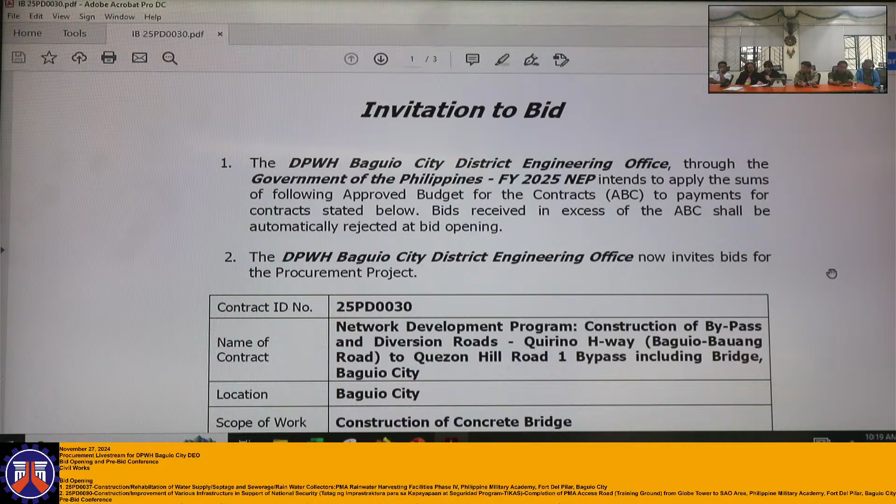Let me state it again. Contract ID number 25PD0030. Name of contract: Network Development Program, Construction of Bypass and Diversion Roads, Quirino Highway, Baguio-Bauang Road to Quezon Hill, Road 1, Bypass including Bridge, Baguio City.

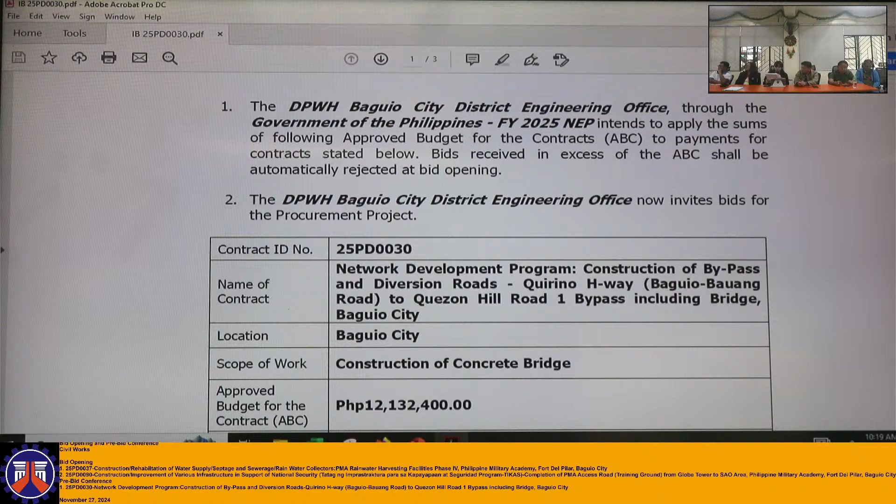Scope of work, location: Baguio City, of course. Scope of work: construction of concrete bridge.

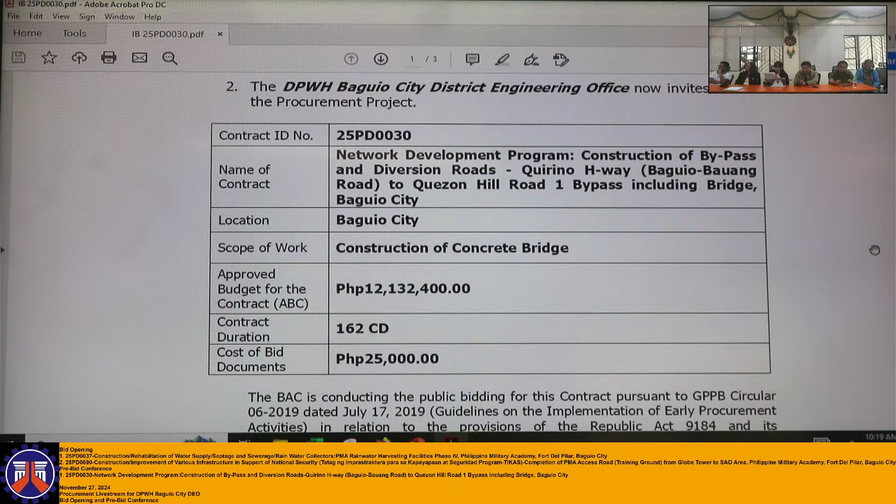The approved budget for the contract is 12,132,400 pesos. Contract duration is 162 calendar days. Cost of bid documents is 25,000.

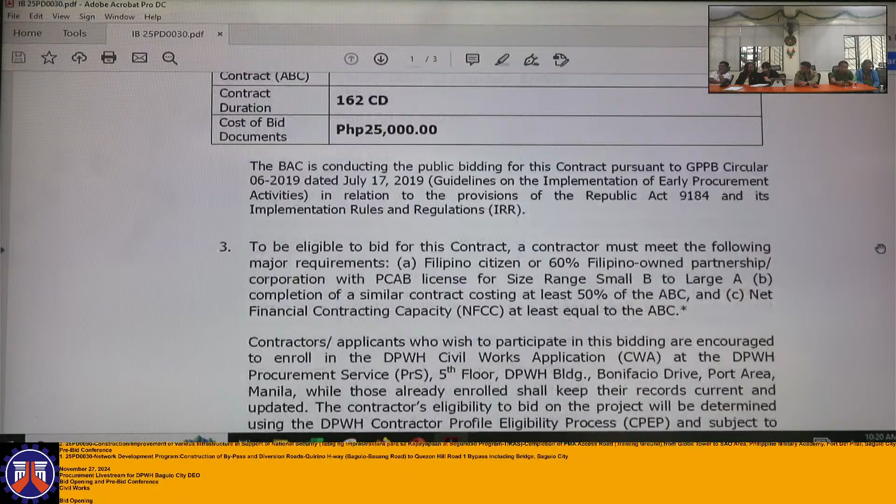The BAC is conducting the public bidding for this contract pursuant to GPPB Circular 06-2019 dated July 17, 2019, Guidelines on the Implementation of Early Procurement Activities in relation to the provisions of Republic Act 9184 and its Implementing Rules and Regulations, IRR.

To be eligible to bid for this contract, a contractor must meet the following major requirements: First, Filipino citizen or 60% Filipino-owned partnership or corporation with PCAB license for size range Small B to Large A; second, completion of a similar contract costing at least 50% of the ABC; and lastly, Net Financial Contracting Capacity, NFCC, at least equal to the ABC.

Contractors and applicants who wish to participate in this bidding are encouraged to enroll in the DPWH Civil Works Application at the DPWH Procurement Service, 5th Floor, DPWH Building, Bonifacio Drive, Port Area, Manila, while those already enrolled shall keep their records current and updated.

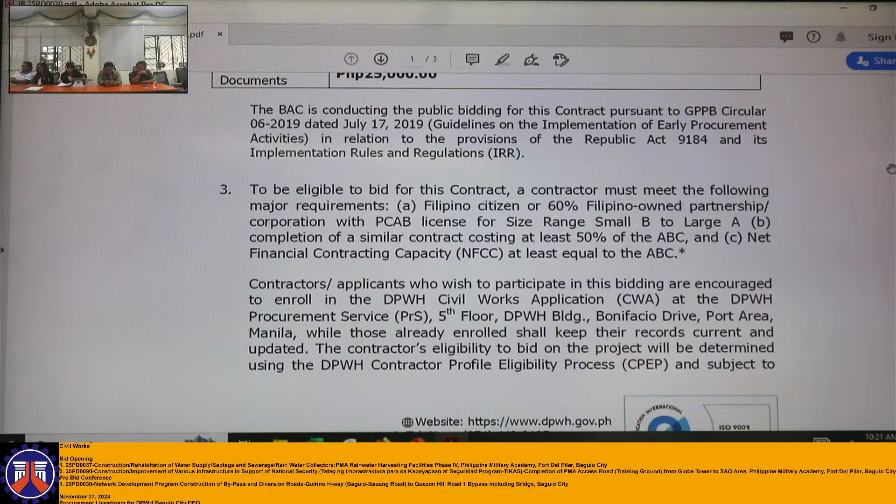The contractor's eligibility to bid on the project will be determined using the DPWH Contractor Profile Eligibility process, subject to further post-qualification. Information on registration can be obtained from the PRS during working weekdays from 7 a.m. to 4 p.m., or at the DPWH website, www.dpwh.gov.ph.

Bidding will be conducted through open competitive bidding procedures using non-discretionary pass-fail criterion as specified in the 2016 Revised Implementing Rules and Regulations of Republic Act Number 9184.

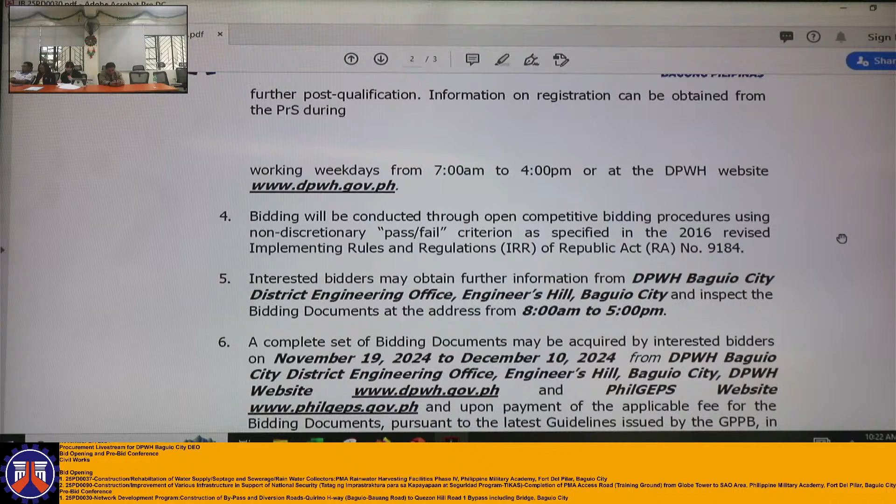Interested bidders may obtain further information from DPWH Baguio City District Engineering Office, Engineer's Hill, Baguio City, and inspect the bidding documents at the address from 8 a.m. to 5 p.m.

A complete set of bidding documents may be acquired by interested bidders from November 19, 2024 to December 10, 2024 from DPWH Baguio City District Engineering Office, Engineer's Hill, Baguio City, the DPWH website www.dpwh.gov.ph, and PhilGEPS website www.philgeps.gov.ph, upon payment of the applicable fee for the bidding documents pursuant to the latest guidelines issued by the GPPB.

In the amount stated, the procuring entity shall allow the bidder to present its proof of payment for the fees if it will be presented in person, by facsimile, or through electronic means.

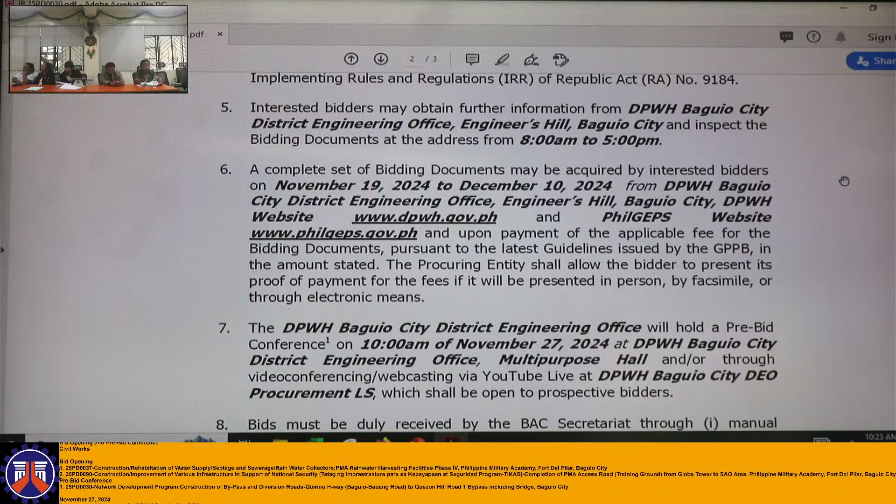The DPWH Baguio City District Engineering Office will hold a pre-bid conference at 10 a.m. on November 27, 2024 at DPWH Baguio City District Engineering Office Multipurpose Hall, and/or through video conferencing and webcasting via YouTube Live at DPWH Baguio City DEO Procurement LS, which shall be open to prospective bidders.

Bids must be duly received by the BAC Secretariat through manual submission at the office address as indicated, or online/electronic submission at electronicbids_baguiocity@dpwh.gov.ph, or both, on or before 10 a.m. of December 10, 2024. Late bids shall not be accepted.

All bids must be accompanied by a bid security in any of the acceptable forms and in the amount stated in ITB Clause 16. Bid opening shall be at 10 a.m. of December 10, 2024 at the given address and/or through electronicbids_baguiocity@dpwh.gov.ph. Bids will be opened in the presence of the bidders' representatives who choose to attend the activity.

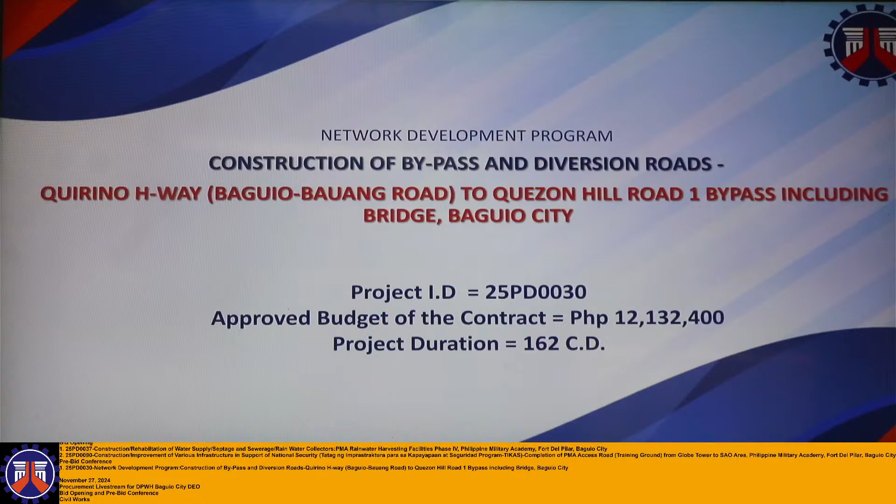The project is at Quirino Highway, Baguio-Bauang Road to Quezon Hill Road 1 bypass, including bridge, Baguio City. The project has a project ID of 25PD0030 and an approved budget of the contract of 12,132,400 pesos, with a project duration of 162 calendar days. This project was coordinated with Barangay Irisan last October 29, 2024.

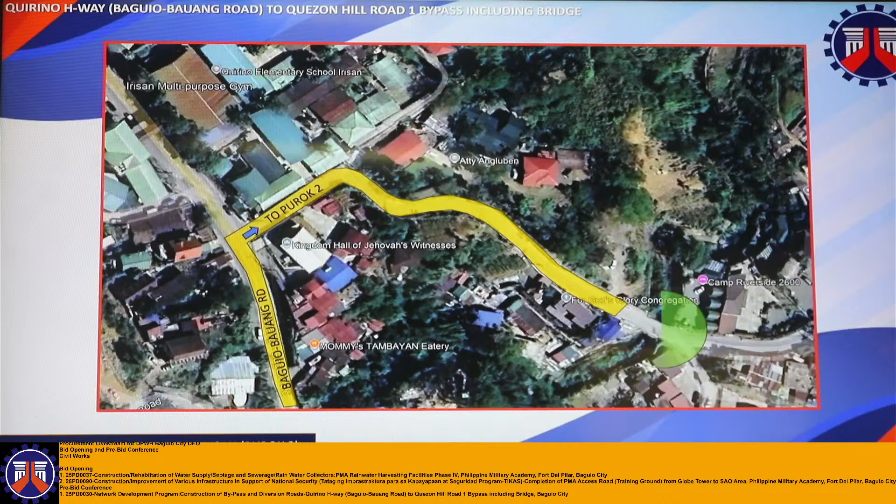For the project location: if this is the Baguio-Bauang Road, it enters Purok 2 near Quirino Elementary School, Irisan. In front of Quirino Elementary School, Irisan, there is a road going down. From that location, we go down 150 meters and this will be our project site.

This part is the bridge, including the road, with scouring protection upstream and downstream of the river. This is the downstream.

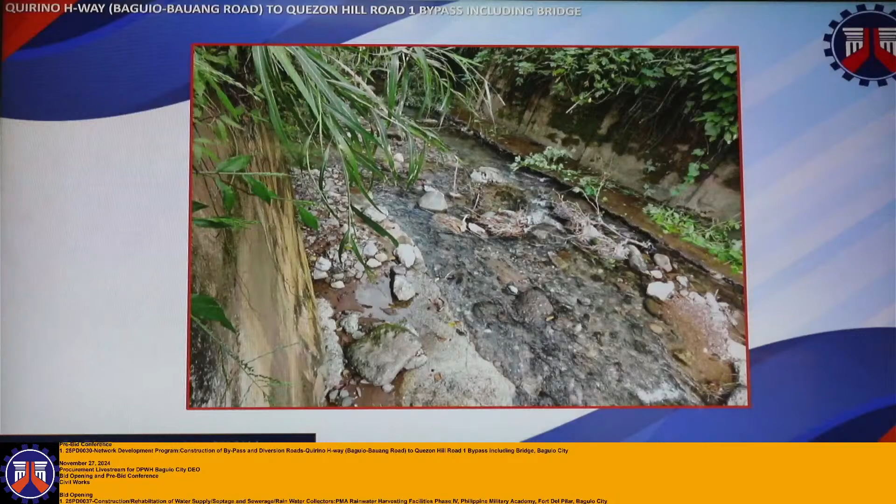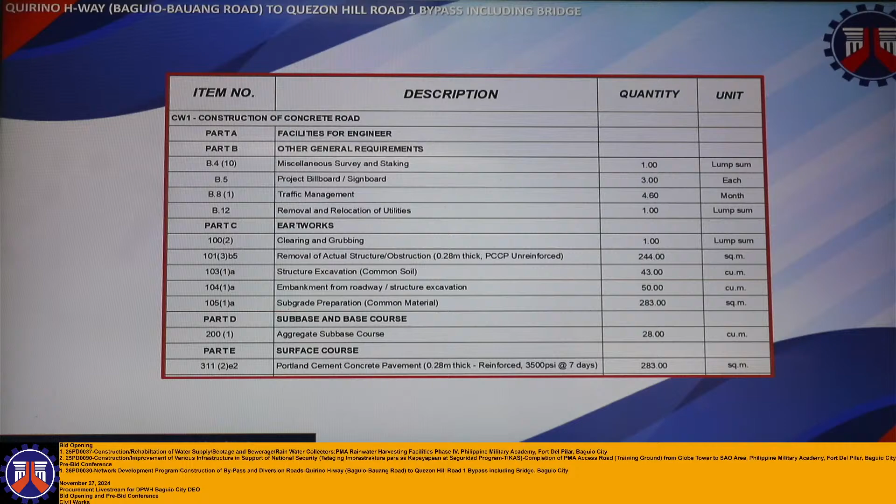For the summary of quantities, for CW1, construction of concrete road: other general requirements, miscellaneous survey and staking, project billboard, traffic management, removal and relocation of utilities. Under earthworks: clearing and grubbing, removal of actual structures, structure excavation, embankment from roadways, structure excavation, subgrade preparation. Under sub-base and base course: aggregate sub-base course, and for surface course, Portland cement concrete pavement 0.28 meter thick, reinforced, 3,500 PSI at 7 days.

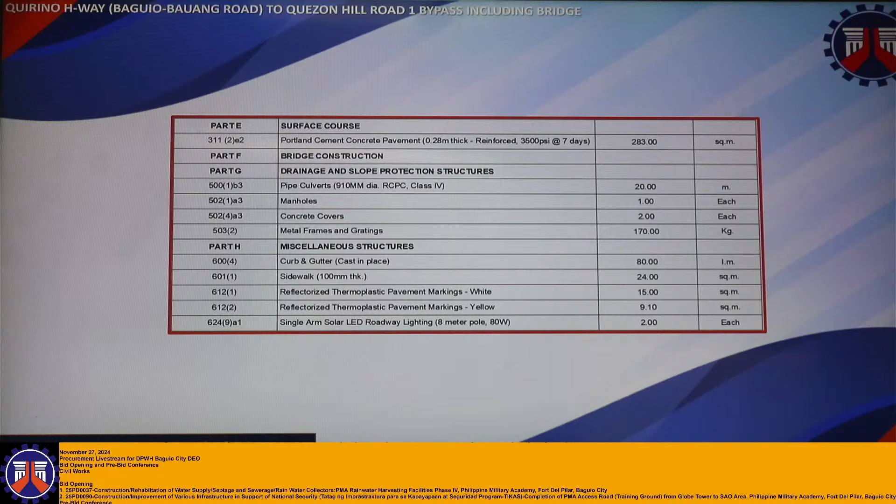For surface course, we have Portland cement concrete pavement. For drainage and slope protection structure, we have pipe culverts, manholes, concrete covers, metal frames, and gratings. For miscellaneous structures: curb and gutters, sidewalk, thermoplastic pavement markings, and single-arm solar LED roadway lighting.

For CW2, under other general requirements: occupational safety and health program, mobilization, demobilization, detour or access road. Under earthworks: shoring, cribbing, and related works, removal of structures and obstructions, structure excavation, bridge structure excavation, hard rock and common soil, foundation fill, selected borrows.

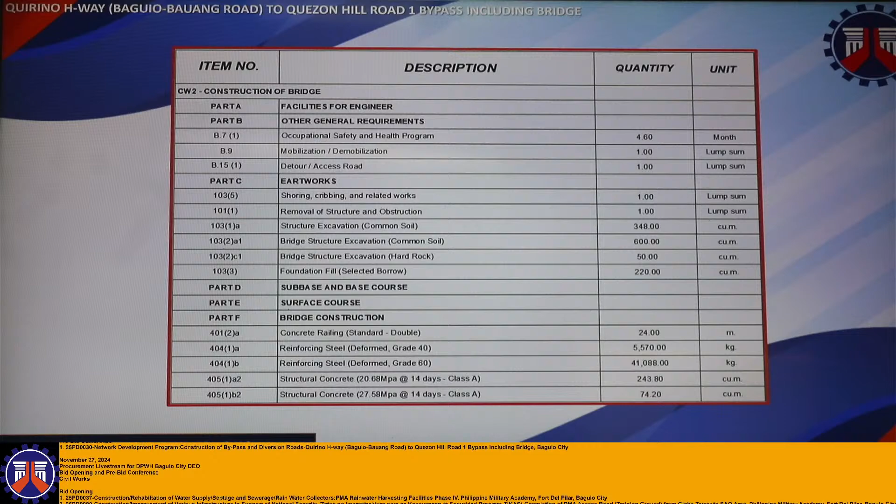Under bridge construction: concrete railing, reinforcing steel deformed grade 40 and grade 60, structural concrete 20.68 MPa at 14 days Class A and 27.58 MPa at 14 days Class A. We also have lean concrete, structural concrete painting works, and pre-molded expansion joint fillers with sealant.

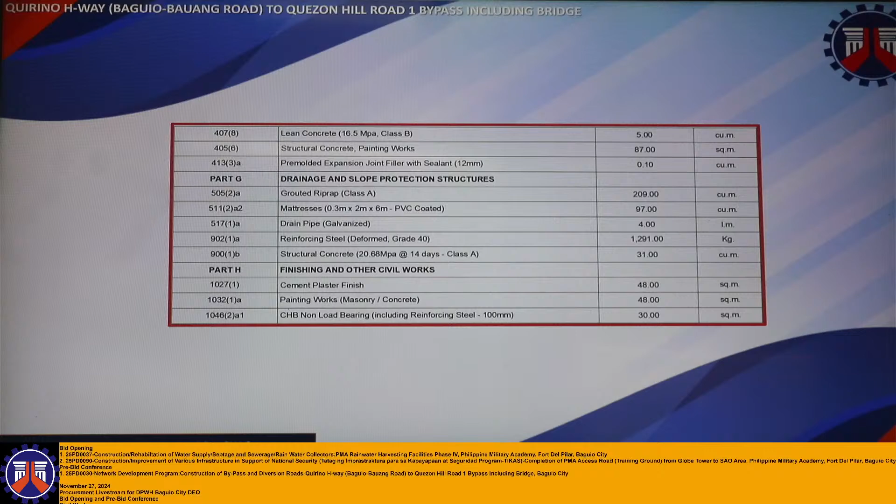Under drainage and slope protection structures: grouted riprap, mattresses, drain pipe, reinforcing steel grade 40, structural concrete 20.68 MPa at 14 days Class A. Under finishing and other civil works: cement plaster finish, painting works, and CHB non-load bearing, including reinforcing steel.

This is the parcellary plan of the project. We have the proposed bridge having a length of 12 meters, with an approach slab of 4.5 meters at both ends of the bridge.

The constructed reinforced concrete PCCP with curb and gutter both sides, having a total length of 10 meters both sides. We will also be constructing a sidewalk at the left side from the start of the project, 10 meters in length as well.

And the proposed pipe culvert with a length of 20 meters, and the proposed manhole with cover. We also have a proposed 2 LED solar roadway lighting at both ends of the bridge, left and right.

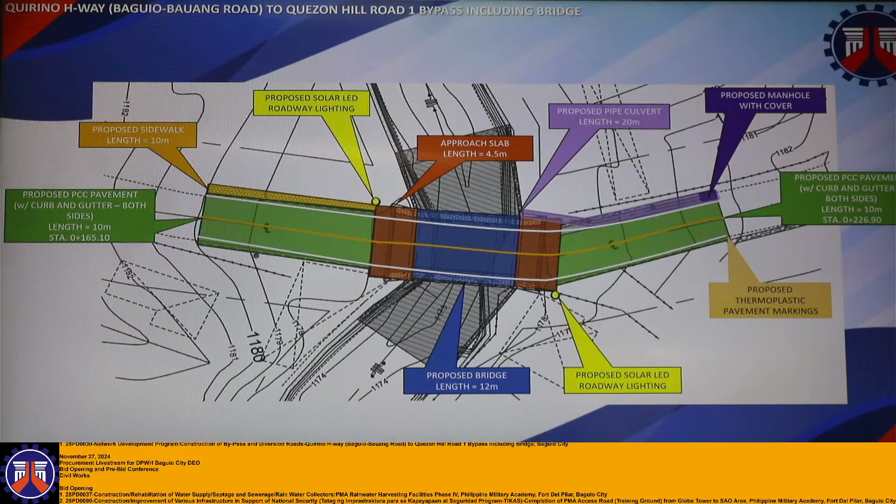And the proposed thermoplastic pavement markings, white at both edges of the road, and for the center line, yellow.

We will build a 3-meter high riprap behind the abutment, both sides, 10 meters in length both sides. And for the protection of the embankment of the river, we will build an approximately average height of 5 meters of riprap, 10 meters in length both sides upstream and 10 meters in length both sides downstream.

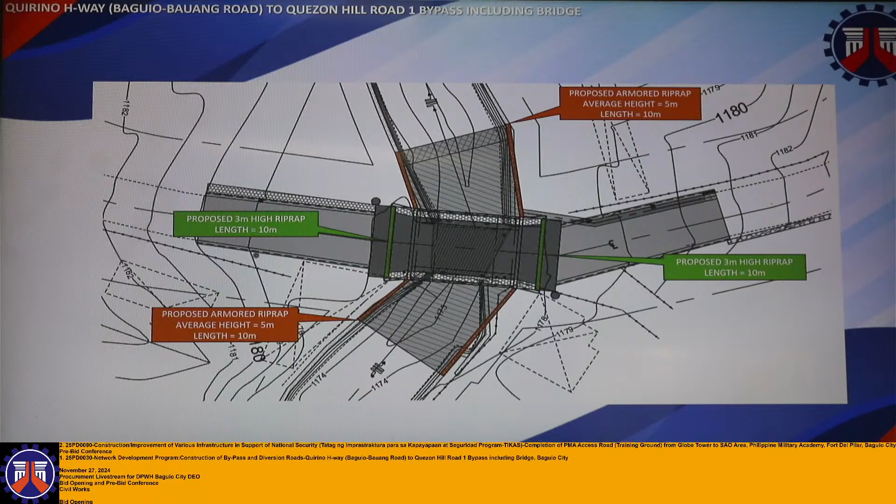For the scouring protection, we will build a mattress 30 meters in length from upstream to downstream, plus an additional mattress downstream of 2 meters in length, and 0.30 meter thickness.

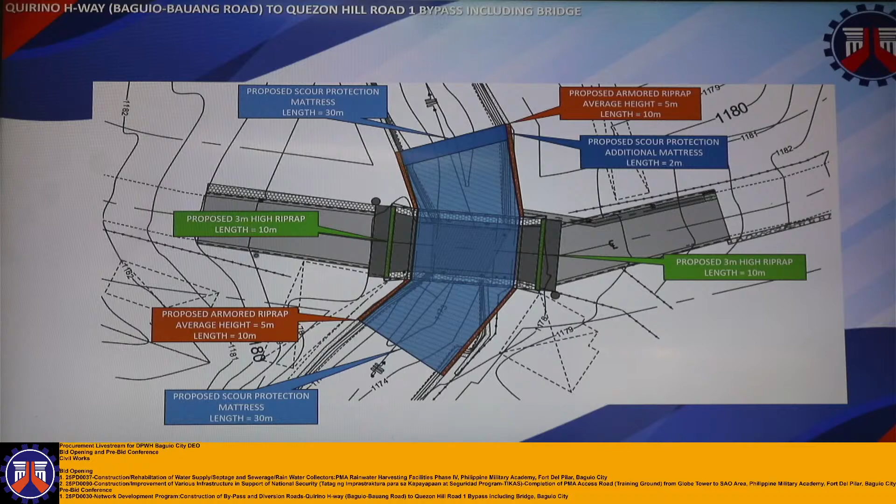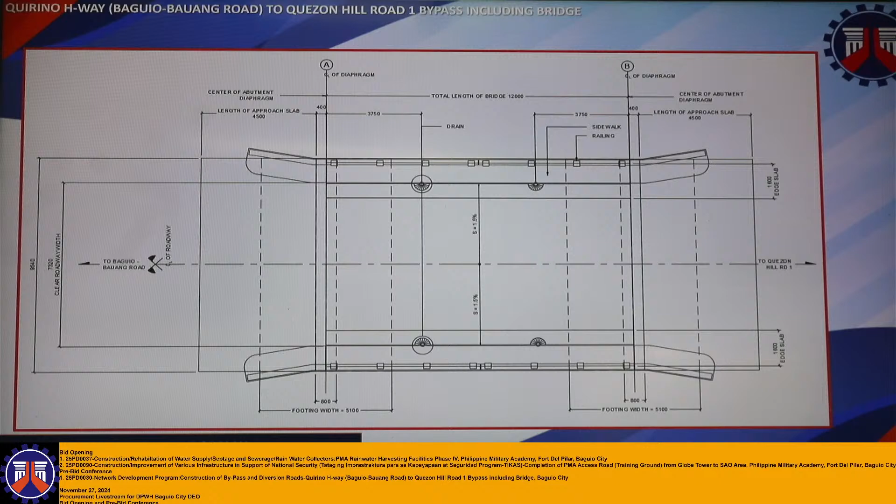This is the bridge plan. The bridge has a total length of 12 meters. The length of the approach slab is 4.5 meters. The total width of the bridge is 9.54 meters. The footing of the abutment will have a width of 5.1 meters. Thickness of the abutment stem would be 800 millimeters.

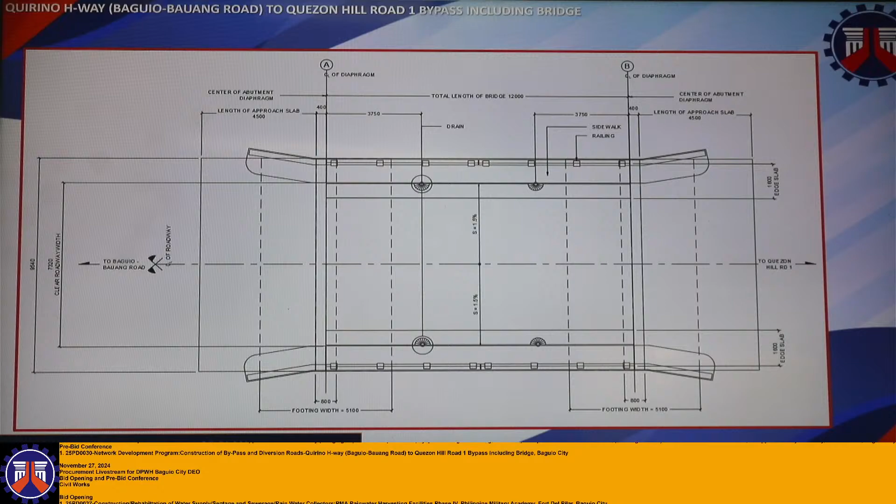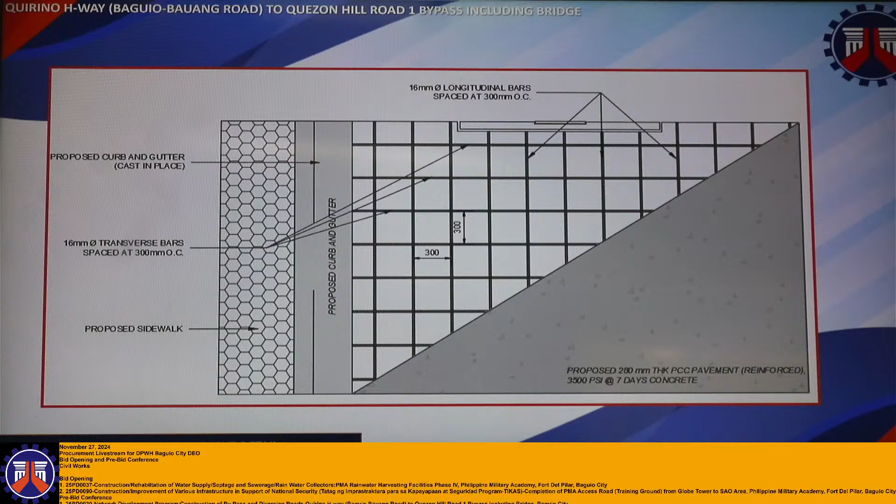So for the 280-millimeter thick PCCP pavement, it is reinforced with 16 millimeter diameter transverse and longitudinal bars spaced at 300 millimeter on center.

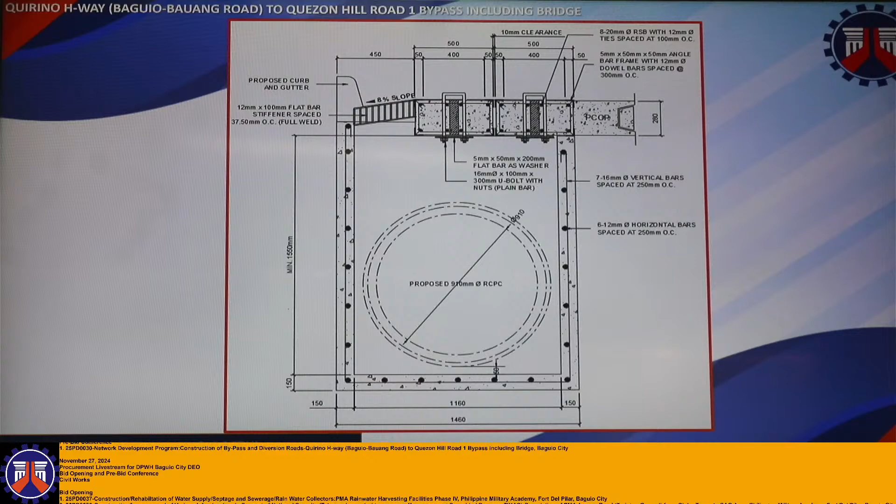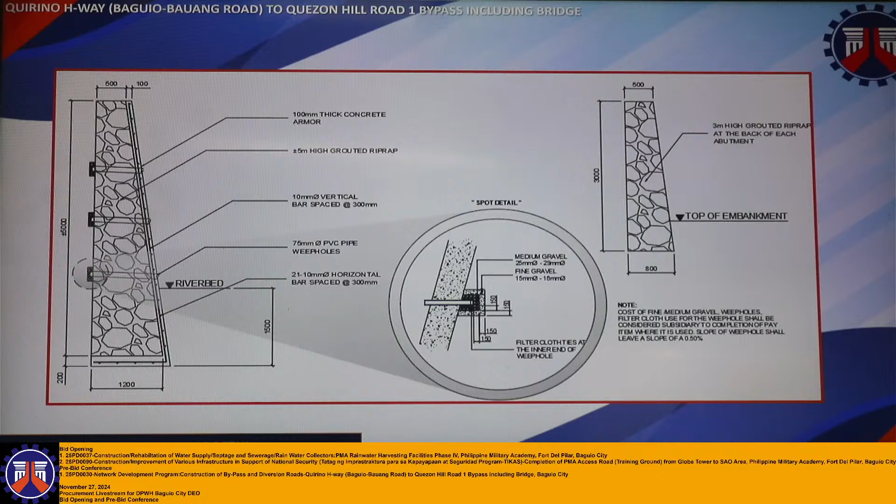And we will be using a 910 millimeter diameter RCPC pipe for the drainage system. This is the proposed riprap detail. For the 3-meter riprap at the back of the abutment, the top width will be 500 millimeter and the bottom width 800 millimeter. For the 7-meter slope protection riprap at the side of the river, armored riprap will be used. Average height of the riprap is 5 meters.

And the width thickness is 500 millimeter and the bottom thickness will be 1200 millimeter. And this is the detail for the roadway lighting. So 8 meters is the height of the single arm lamppost. Bottom diameter will be 8 inches and the top diameter will be 4 inches with a thickness of 3.50 millimeter. For the base, we will be using a 500 millimeter by 500 millimeter reinforced concrete pedestal.

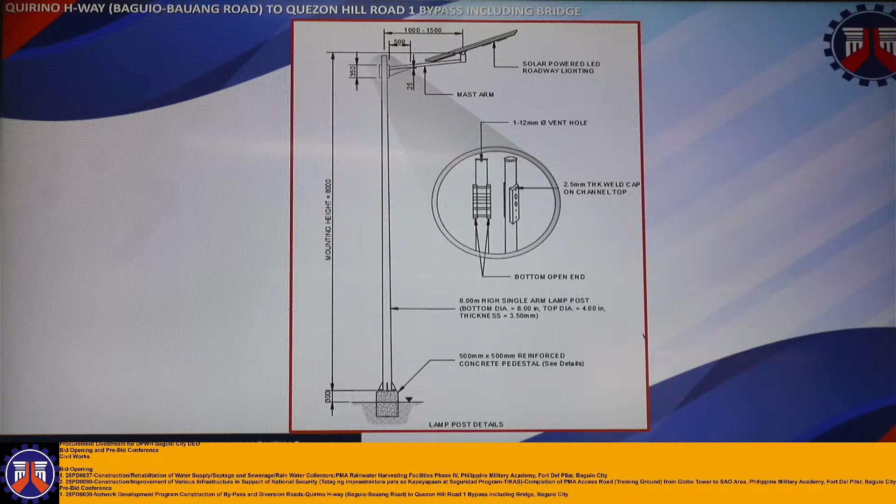And we will use solar LED roadway lighting. And that is the end of the presentation. Thank you.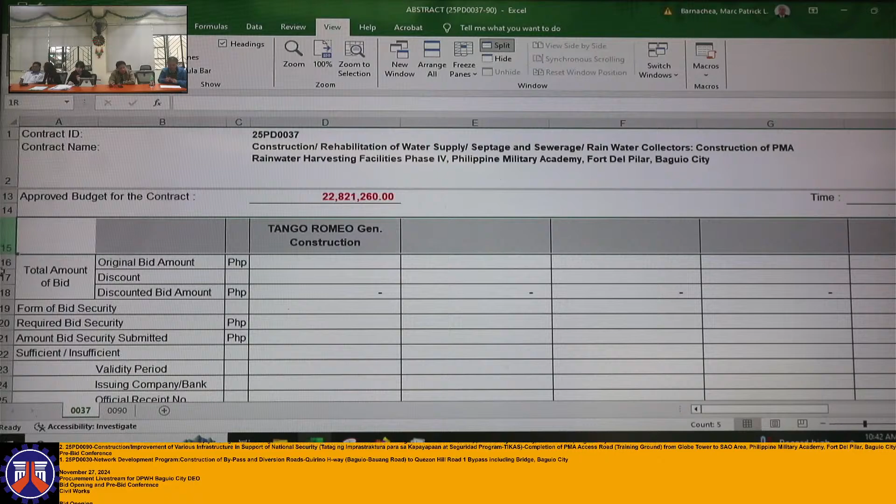The approved budget for the contract is 22,821,260.

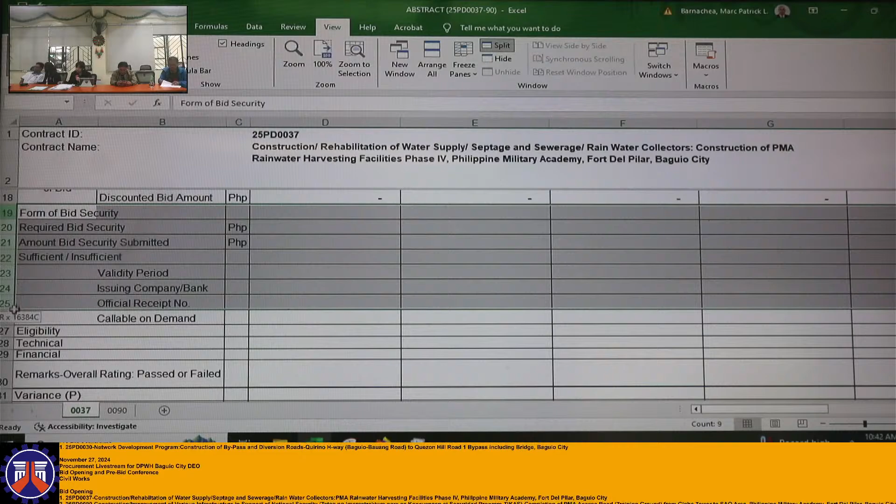And the other project, contract ID number 25PD0090, construction improvement of various infrastructure in support of national security, Tatag ng Imprastraktura para sa Kapayapaan at Seguridad Program-TIKAS, completion of PMA access road training ground from Globe Tower to SAO area, Philippine Military Academy, Fort del Pilar, Baguio City.

The approved budget for the contract is 73,340,000.

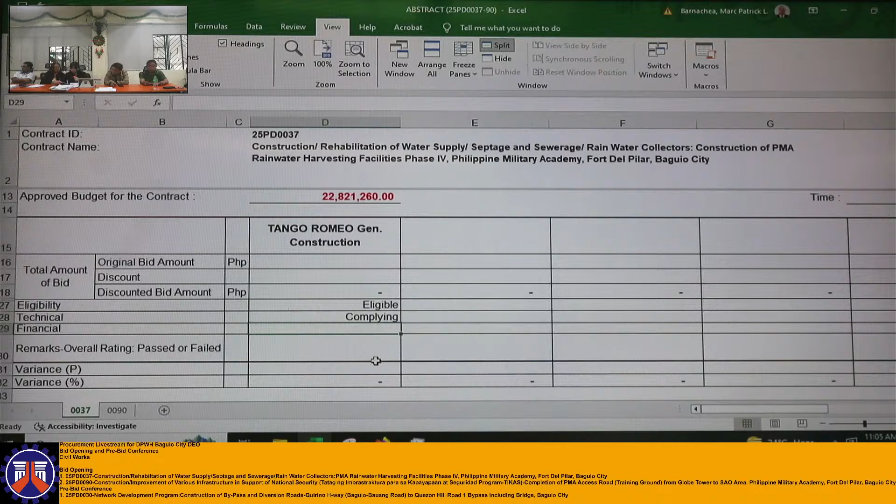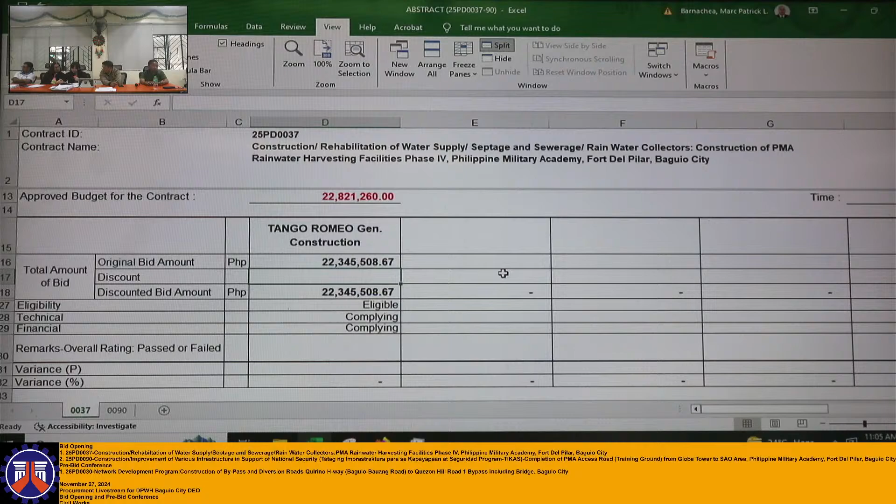Okay, to continue, all the submitted financial proposals are complying. So for contract ID 25PD0037, name of contractor Tango Romeo General Construction. The amount of bid offered is 22,345,508 pesos and 67 centavos only. Again, 22,345,508 pesos and 67 centavos only. No discount offered.

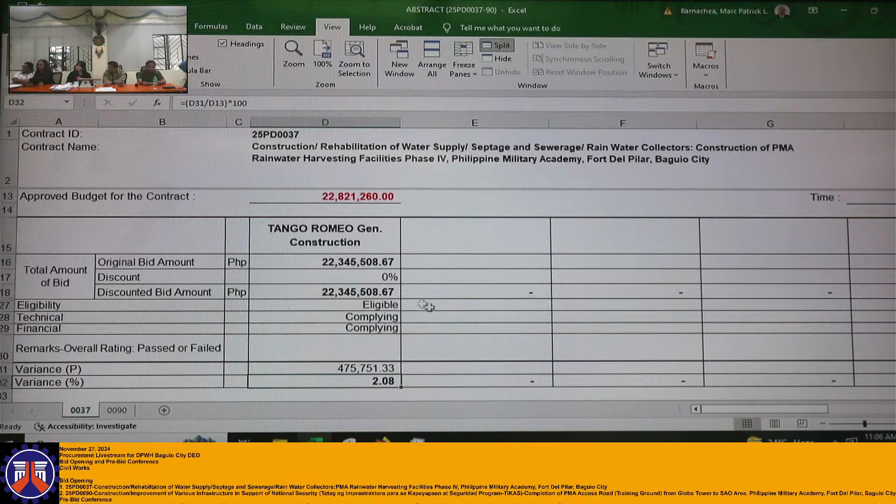May I request Engineer Banagaw for the confirmation? Okay, the offered bid of Tango Romeo for this contract ID number is 22,345,508 pesos and 67 centavos. Same as declared by our BAC chairman.

For contract ID 25PD0090, name of bidder Goldrich Construction and Trading. The amount of bid offered is 71,839,374 pesos and 48 centavos only. Again, 71,839,374 pesos and 48 centavos only. No discounts offered.

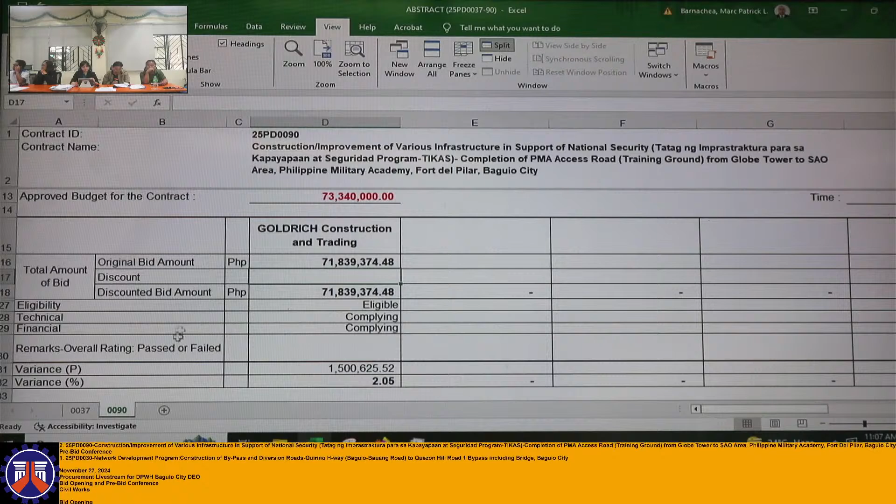May I request Engineer Banagaw for the confirmation? Okay, for confirmation, the offered bid of Goldrich Construction for this contract ID number is 71,839,374 pesos and 48 centavos. I'll repeat, 71,839,374 pesos and 48 centavos. No offer discount, same as declared by BAC chairman.